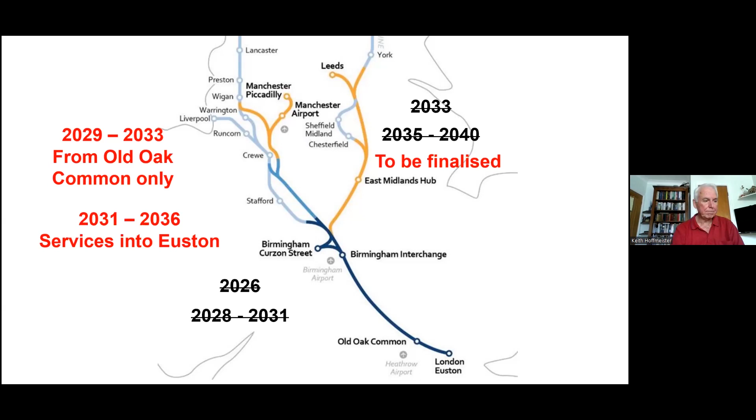Last November, it was announced that the eastern leg to Leeds would be cancelled. It's estimated that stopping construction at East Midlands Hub rather than Leeds would save £18 billion.

Last month, Andrew Stephenson, the HS2 minister, confirmed that the Golborne link between Crewe and Manchester will also be cancelled, saving another £3 billion.

Trains will eventually leave a massively redeveloped Euston station in a tunnel. HS2 has shifted its focus from developing a world-class rail station at Euston to one that is highly functional and affordable. Following months of deliberation, HS2 changed the design for Euston to a station with 10 platforms rather than 11 to save cost.

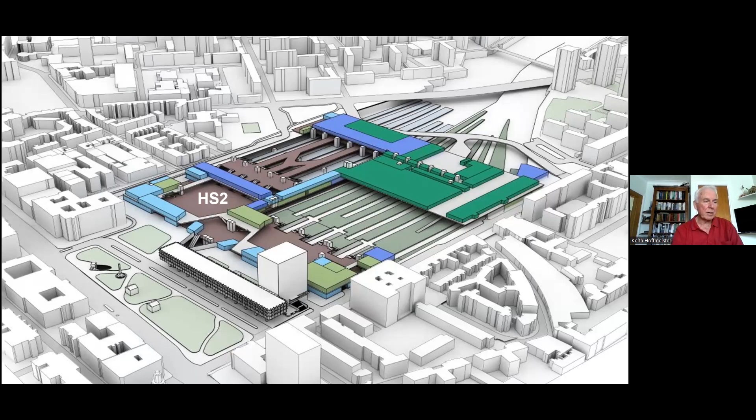It will have 14 platforms: 6 for HS2, 4 Elizabeth Line platforms, and 4 conventional rail platforms for Heathrow Express and Great Western Railway services to Wales and the South West.

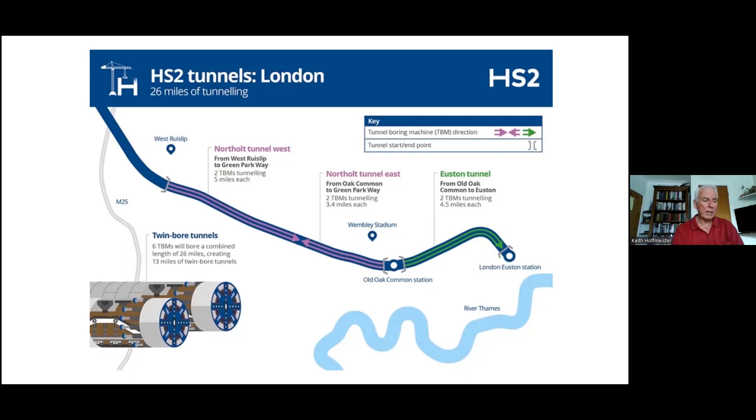The route will continue in a tunnel, and there will be 6 tunnel boring machines, TBMs as we refer to them, and they will bore two 13-mile tunnels. They will be starting soon. They're being assembled now at West Ruislip. They will take nearly 2 years to dig the tunnels, finishing early in 2024.

The route continues on towards West Ruislip Station, where it leaves into a cutting 15 metres deep. It then continues alongside the existing Chiltern railway line, the line that goes through High Wycombe rather than the Amersham and Wendover branch.

This shows preparations for the construction of the tunnel portal, and as I say, it's also where they're assembling 2 of the tunnel boring machines.

The route crosses the Colne Valley Regional Park near Denham on a viaduct over 2 miles long and up to 10 metres high, with trains travelling at 200 miles an hour. It will be the longest viaduct in the country by a considerable distance.

A haul road is being constructed along the length of the viaduct on a series of jetties across 4 lakes. This will take most of the construction traffic off local roads. Here we're looking back across the first lake, known as Harefield No. 2 Lake, towards the south end of the viaduct.

It then crosses the Grand Union Canal, and we are assured that the towpath will remain open during construction. There's a break in the haul road here, a missing link, which is in fact across the Grand Union Canal.

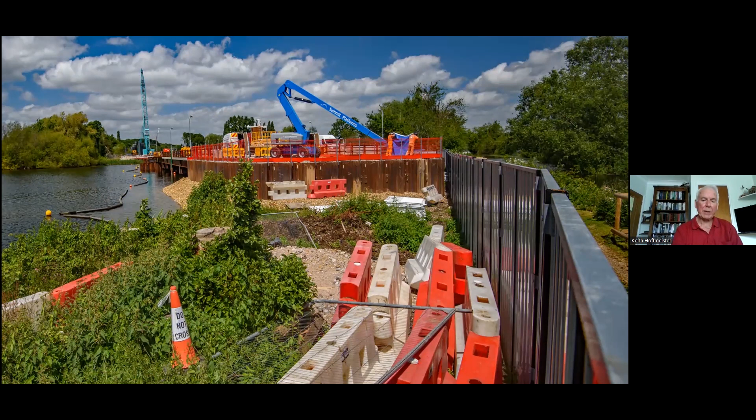The viaduct will be supported by 56 piers, most of which will be built in the lakes. This is already at just north of the Grand Union Canal. This is pier number 20, and it's on the edge of Savay Lake.

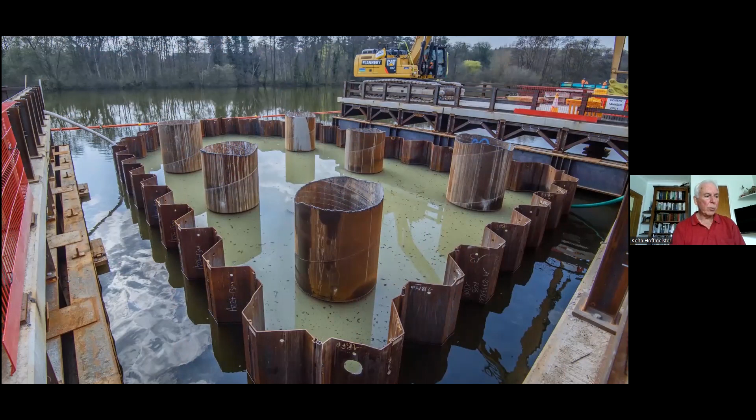292 bored piles up to 55 metres deep will be required to support the viaduct piers and the abutments at each end of the viaduct.

The haul road then crosses Moorhall Road and Korda Lake. Apparently the fish have been removed from here to a new temporary home.

The jetties cross the River Colne, and this has been slightly diverted around one of the viaduct piers.

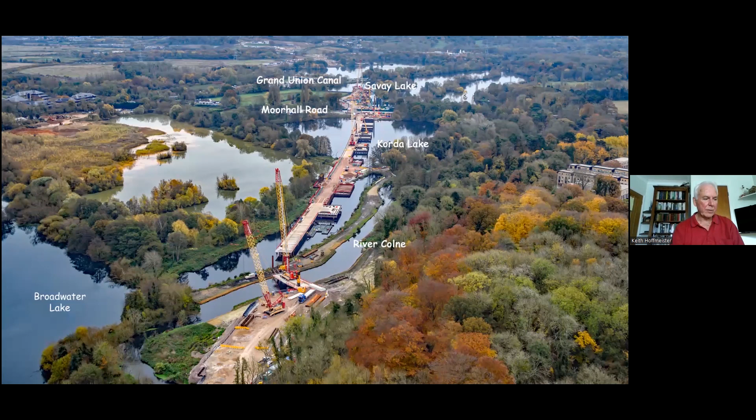Here we're looking south, back along the route as it crosses the regional park, and you can see almost the entire length of the viaduct there. You can just make out the southern end of the viaduct beyond the canal.

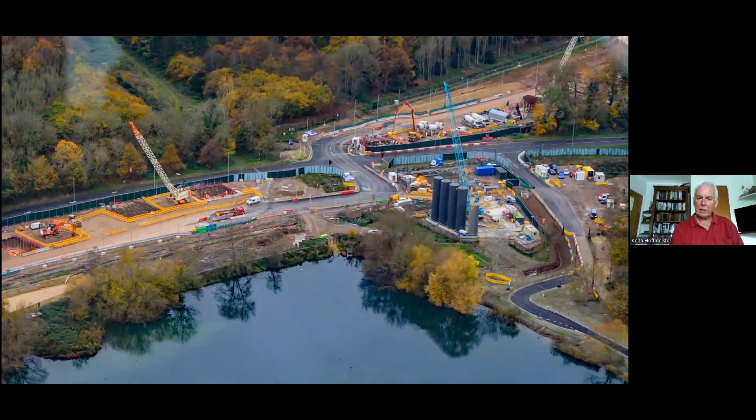The route then crosses the A412 North Orbital Road at West Hyde, and this is looking east along the North Orbital towards Maple Cross.

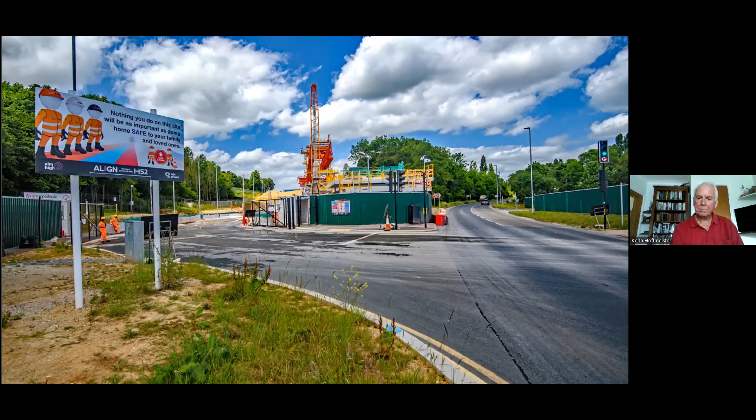Construction of the viaduct started at the end of May, and it's been due to be completed at the end of 2024. This is the launching girder, which is used to put the viaduct deck in place. It's not actually new and has previously been used to build a viaduct between Hong Kong and Macau.

You can see here the sections of the viaduct being gradually lifted into place. It doesn't happen very quickly, and if you stand watching, you're wondering whether anything is happening. But that's the first sections of deck being lifted into place. And this is just beyond there. This is the north abutment, where the viaduct joins the West Hyde embankment, which then continues off to the right.

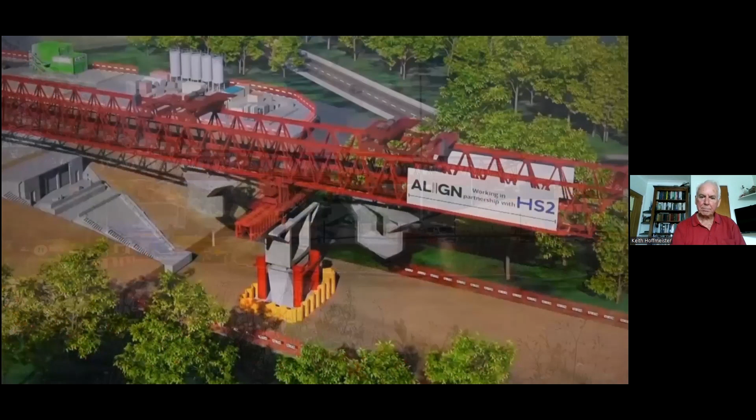This HS2 video just shows you how the sections are put into place.

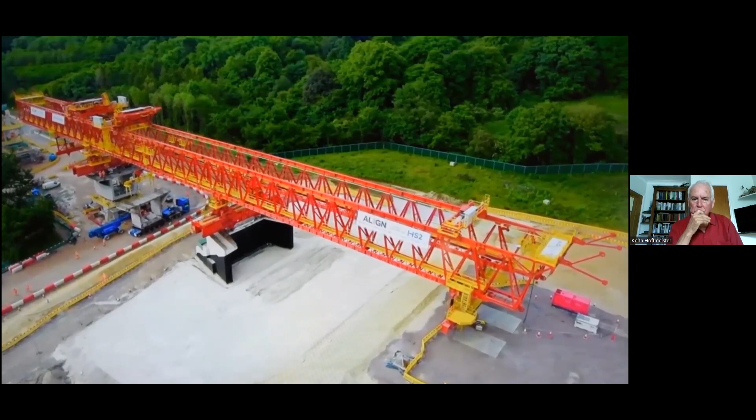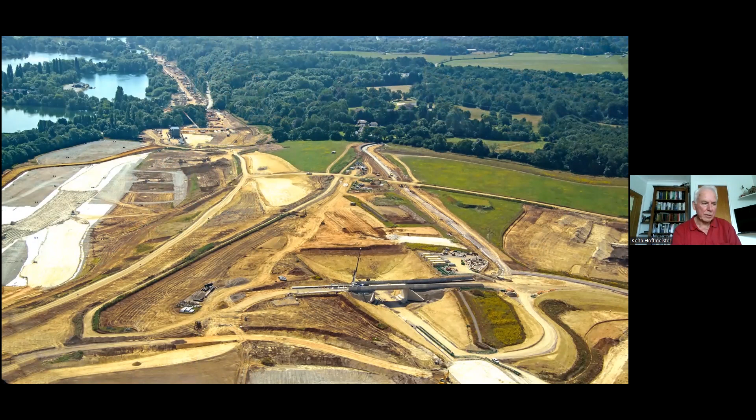Quite an amazing structure. The route then leaves the viaduct on the embankment and into the Tilehouse Lane cutting. And this shows the realigned lane crossing over Tilehouse Lane overbridge. Here we're looking back along the route under the Tilehouse Lane bridge.

And this is the Chiltern Tunnel's South Portal construction compound, and it's huge. It covers 136 acres. And when we talk about portal, that's just another name for the entrance and exit to a tunnel.

Apart from extensive office accommodation, there are a number of factories and storage facilities, as well as a visitor centre. This is the only site that provides overnight accommodation, which you can see just to the south of the main car park. The overnight accommodation is mainly for those working around the clock on the tunnel boring machines.

The first building you can see, the biggest building, is the Viaduct Segment Factory. Then the next one is the Tunnel Lining Segment Factory, and the far building is the Slurry Treatment Plant. There's also a water treatment plant to treat the excess water created by the tunnelling operations, and the batching plant, along with the surface water from the site.

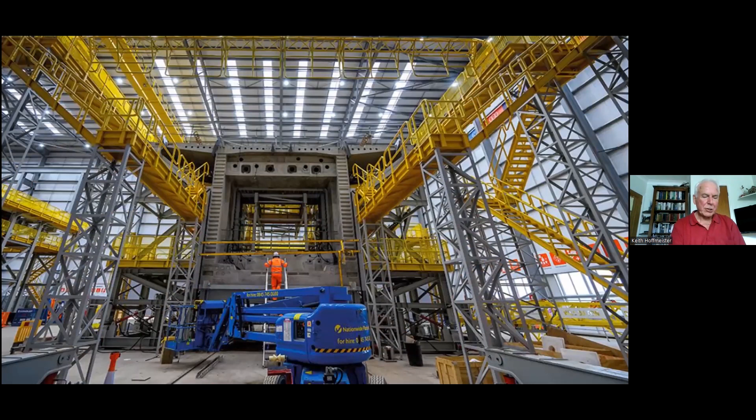This is the Viaduct Precast Factory, and it's huge - actually bigger than the Albert Hall. Each section is cast against its predecessor to ensure a perfect fit. Each will weigh up to 140 tons, and they're currently making 12 each week.

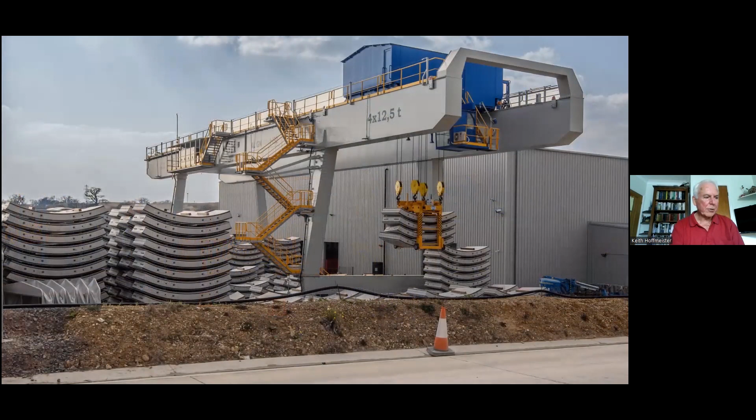They are moved outside to cure and then taken along the haul road as they're needed. The giant crane, which moves the segments around the worksite, has the biggest lifting capacity in the UK, and this is actually the first time it's ever been built and put to use.

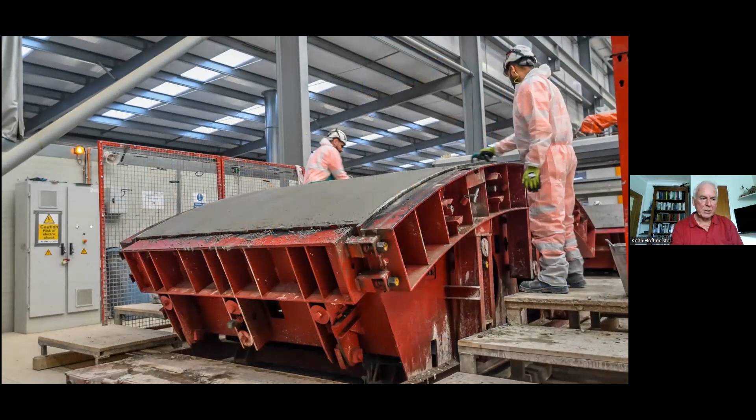The second building is the tunnel lining segment factory. 196 lining segments are made each day, and each of them weighs 8 tons. They are not all identical, and each has an identifying barcode. They are stored outside for 28 days to cure.

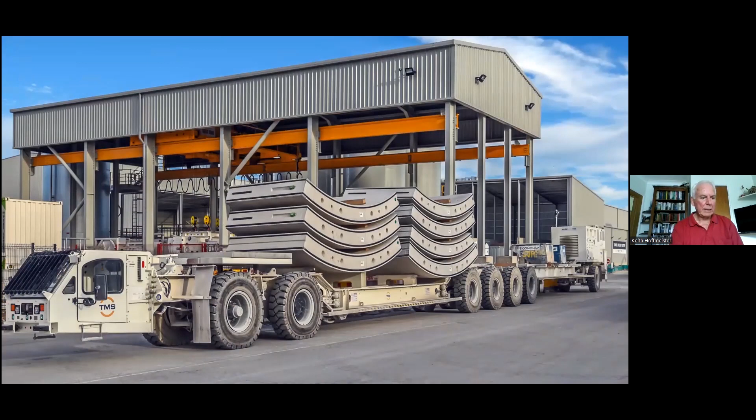And then moved along the tunnel on these double-ended vehicles. Each section of the tunnel contains 7 segments, and there you can see there's 7 segments on the back, so they're taken up one section at a time.

And if you think about it, they will have to travel up to 10 miles to get to the northern end of the tunnel. I think it's a difficult logistical problem to make sure that they all arrive - they're not all the same - and they all arrive in the right place at the right time. Quite incredible.

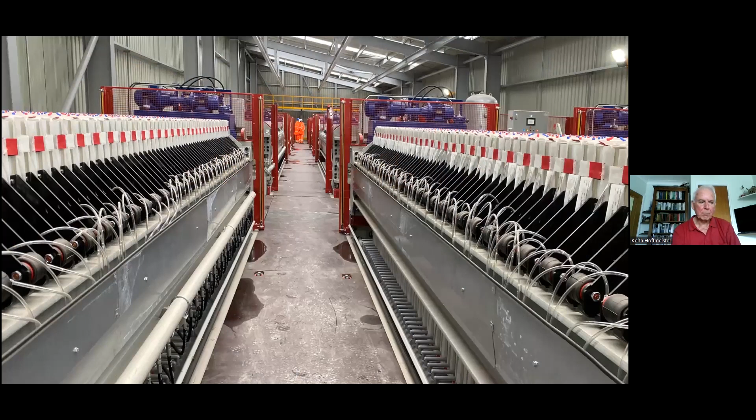The third building is the slurry treatment plant. 3 million cubic meters of spoil will be removed from the tunnel and treated here. This is the largest filter press in the world, where water is removed by squeezing the slurry at a pressure of over 200 pounds per square inch. And they can process 30 tons of slurry every hour.

The treated slurry is then used for local landscaping and was indeed used for the construction of the viaduct embankment, which we mentioned earlier. This will also help create around 90 hectares of wildlife-rich chalk grassland habitats once construction is complete.

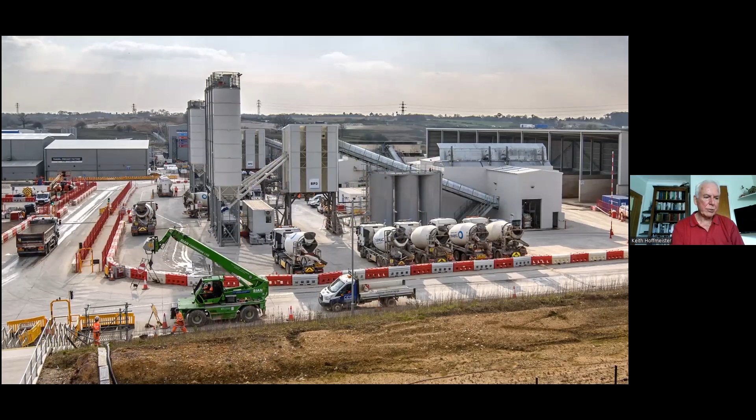The batching plant here produces all the concrete used on site, as well as for all the tunnel vent shafts and the North Tunnel portal. And this saves an awful lot of lorry journeys because, as you'll see later on, subsequent sites have to import viaduct sections and they all come in by road.

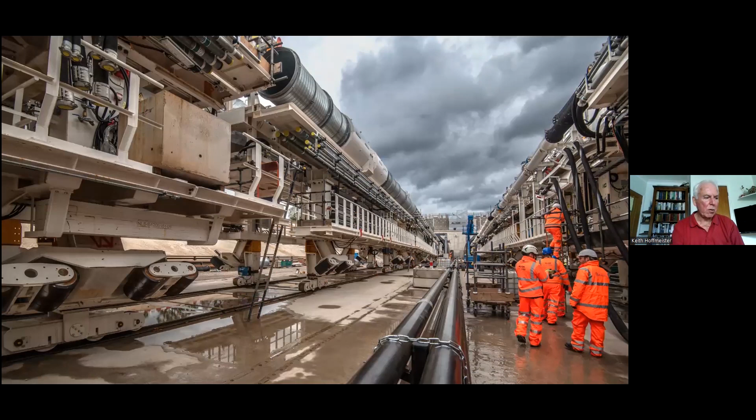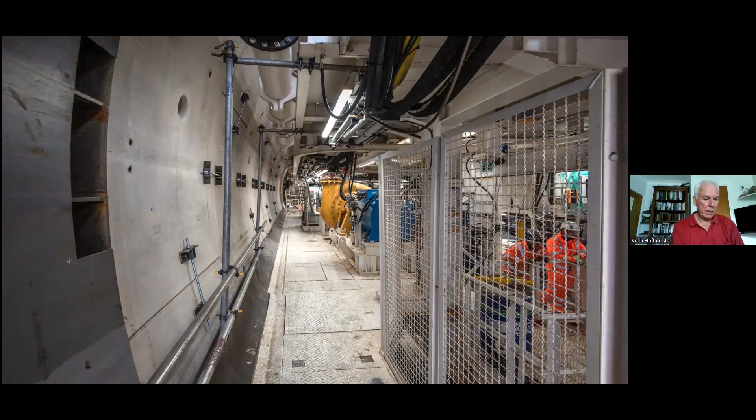The 2 TBMs are nearly 200 meters long and have been specifically designed for the mix of chalk and flint they will encounter in the Chilterns. They began tunnelling in May last year, and they are expected to take around 3 years to excavate the 9-meter diameter tunnels, cutting around 15 meters a day. Each has a crew of 17 people.

And here you can just see, this is the start of the tunnel. You can just see the beginning of the first section on the left-hand side.

And this is inside the tunnelling shield, where the spoil will be mixed with water to form a slurry, which will then be pumped back to the treatment plant.

And this shows the tunnel lining section being put into place - 7 segments in each section, each weighing up to 8 tons, and they're put into place by this giant robotic arm.

So far, at the beginning of this month, they've done 3 miles of tunnelling. They've passed under Chalfont St Peter and are on their way towards the Chalfont St Giles vent shaft.

In May, there was a fire in one of the tunnels. It was on a vehicle that transports workers into the tunnel, one that's shown here. The three removed themselves safely from the car and sheltered within the TBM safety chamber. Hertfordshire Fire and Rescue Service were in attendance, but were not used.

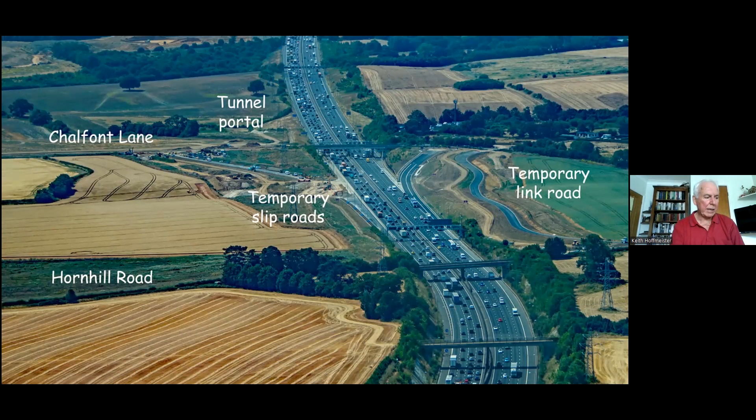All the HGVs arriving at this compound now use the temporary slip roads directly onto and off the M25.

The route then enters the 10.6-mile long twin-bore Chiltern tunnel, passing under the M25. There will be cross passages between the tunnels every 320 metres, and there will be some 40 in total.

This shows the 4 tunnel ventilation shafts across the Chilterns, and there will also be an intervention shaft near the North Portal at South Heath. These would also be used for emergency access during operation of the railway.

Tunnels will be up to 90 metres deep, and the deepest part is just before the Amersham shaft at the top of Gore Hill. The A413, which we mentioned, is the main road passing the Chalfonts and Amersham, and then on to Great Missenden and Wendover.

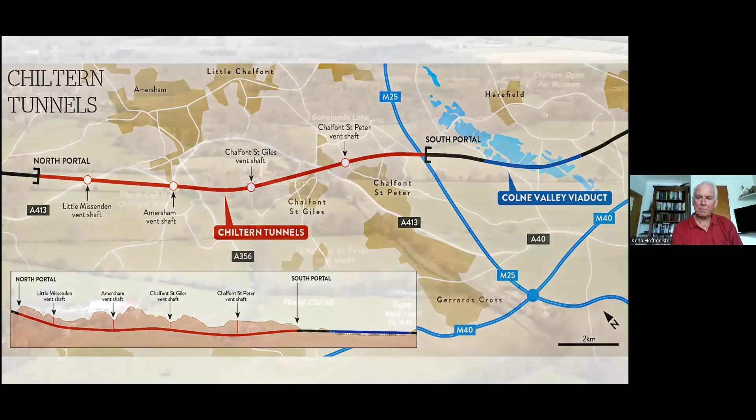The first of the vent shafts is in Gorelands Lane, Chalfont St Peter, up near the Chiltern Open Air Museum.

This shows how all the ventilation shafts will be constructed. Put simply, a cylindrical hole is cut, then filled with concrete creating the diaphragm wall, known as the D-wall. That's what it's known as. The spoil is then removed, creating the shaft with a base added in preparation for the arrival of the TBMs.

A head house is finally built over the shaft, and this is the only part that will be visible above ground level. The vent shaft here is now complete, and the internal structures are being installed. You'll notice now when you visit, if you pass any of these shafts, there's a huge crane in place, and this is what they're doing, putting the internal structures in.

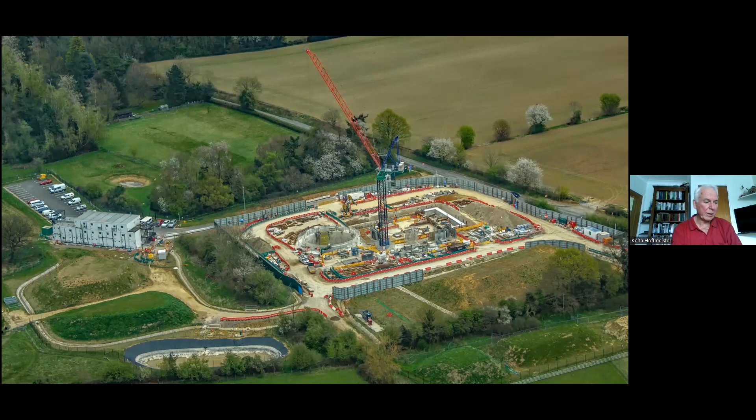A basement for the ventilation fans has also been constructed, and this is the deepest of the shafts at 78 metres. The TBMs passed here in March. This was the first shaft they arrived at.

This gives you an idea of what the head house would look like, the design for the head house, and it was decided after consultation with relevant bodies. It's designed to look like a farm building in a rural location. In fact, all of the shafts, other than Amersham, which we'll come on to later, look like farm buildings.

A 400-metre long temporary haul road here links the site directly to the A413. All the construction sites have approved access routes, and the one for this site is via the A413 to the A40 at Gerrards Cross, and then the M40 and on to the M25.

Temporary traffic lights control traffic on the A413. This is the first, if you're coming towards travelling away from the Chalfonts, this is the first of the traffic lights, and there'll be an operation till the shaft is completed, which will be early in 2025.

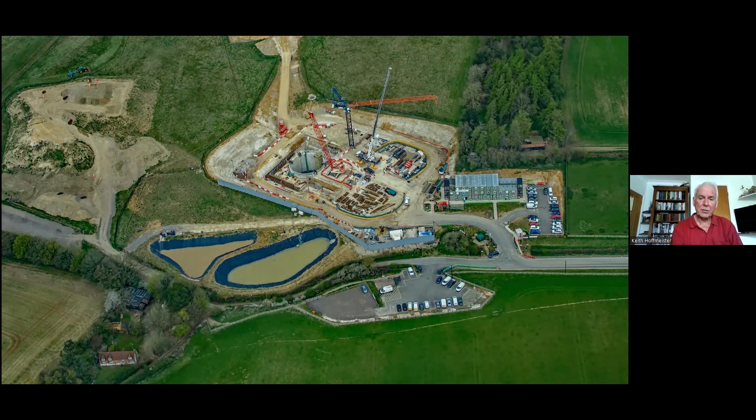Excavation of the shaft here is complete and the base slab of the shaft is being formed. The basement that will house the fans is also being constructed. Tunnel depth here is over 34 metres and the site will also house an auto transformer station.

The TBMs are due to arrive in August or September this year, and work is due to be finished by January 2025.

There are worse places to be a crane driver. This is a quite extraordinary picture. I think this is one of the cranes that are now in place at most of the shaft sites.

Access to the shaft is via a temporary haul road linking it to the A413, and this will be removed once construction of the vent shaft is complete.

The approved access route for this site is the same as for the Chalfont St Peter shaft, and all HGVs have to turn right when leaving the haul road.

The entrance to Bottom House Farm Lane is stopped up, and there is a link to the haul road to provide access further down the haul road. And this is actually where the two link.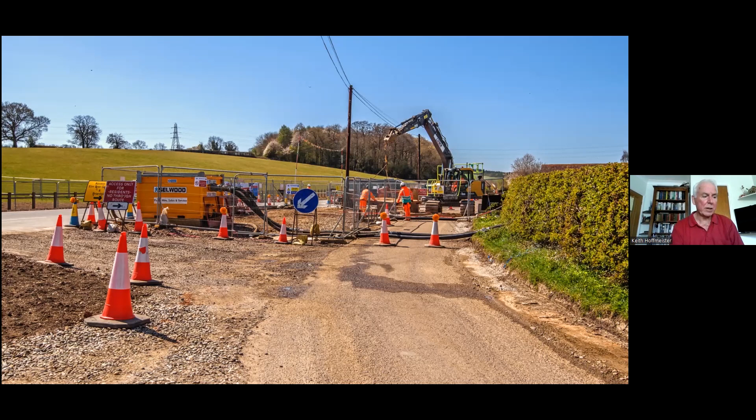The lane was closed to all traffic for much of last year. Frustratingly, this included pedestrians and cyclists. A large drain was installed alongside the length of the lane.

The lane was also widened to provide permanent access to the vent shaft. It remains single lane, but passing places have been added.

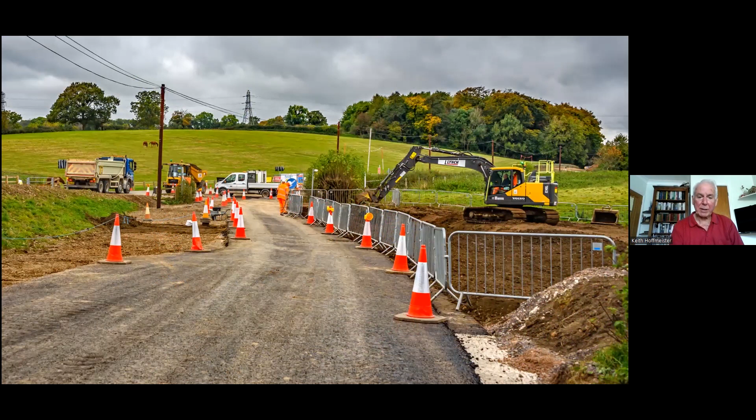Half a mile of hedging, the whole of one side, all the way up to the vent shaft, was removed, very sadly and very shockingly. This is probably at the worst of times here.

The whole road was removed, and the hedge on one side, and it was replaced with the haul road.

And once the haul road is removed, which it will be when construction is complete, the lane will be restored, and planting hopefully will restore it to somewhere. It won't be quite as dramatic as it was, but at least it will be an improvement on how it is now.

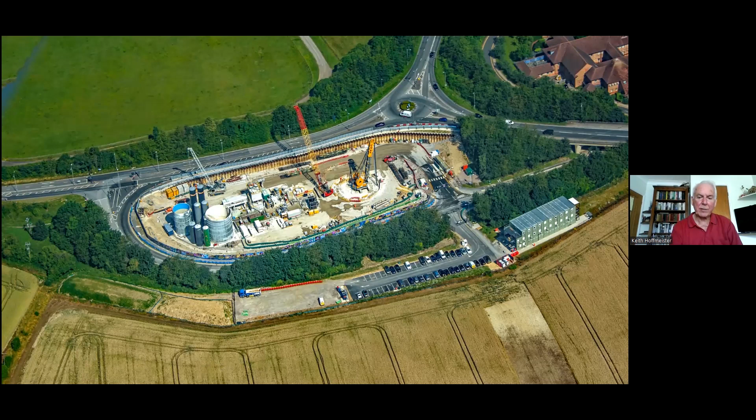This was taken when construction of the D-wall was underway. The tunnel depth here will be over 40 metres. All the shafts will have a permanent area of hard standing for emergency service vehicles.

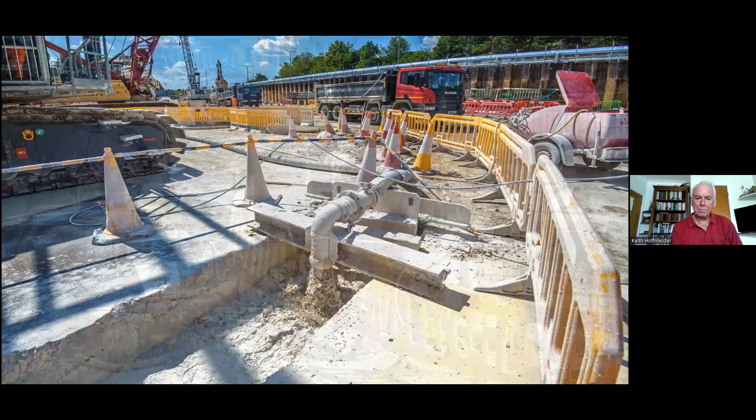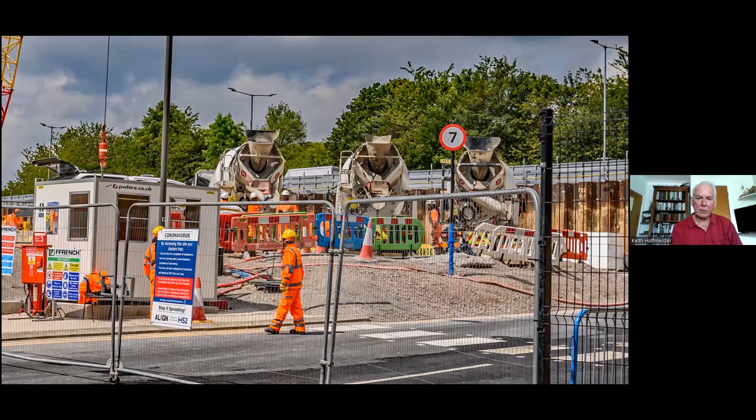The bentonite slurry is used to lubricate the drill and to stabilize the cutting. Each panel was then filled with concrete in a continuous process. And as I've mentioned, concrete for all the shafts comes from the batching plant at the South Tunnel portal.

All the vehicles have their wheels washed before leaving all the sites. Something they're very concerned about is spreading mud onto the roads.

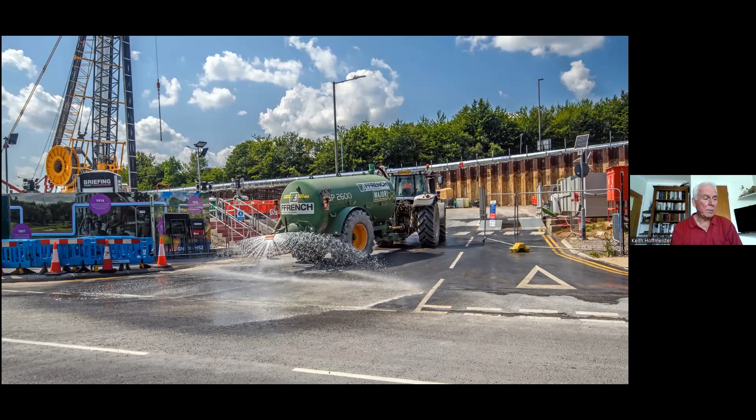In weather like this, dust is a big problem, and there's continuous dust suppression with this bowser going from one site to another, just trying to keep the dust down.

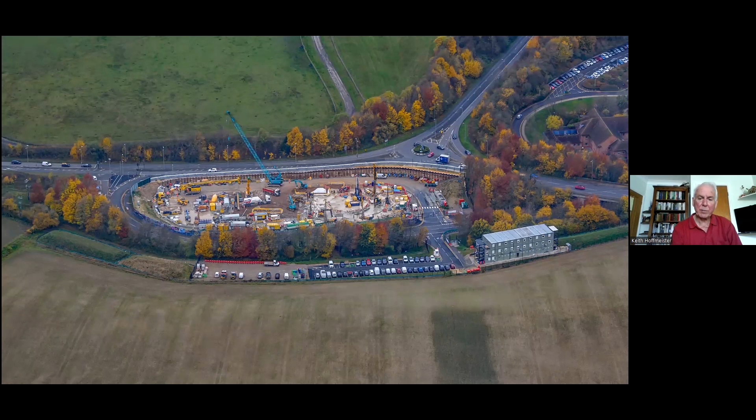Once the D-walling was complete, the associated plant was removed in preparation for the next stage, and this involved the insertion of grouting into a ring of piles drilled around the shaft to stabilize the area all around the shaft.

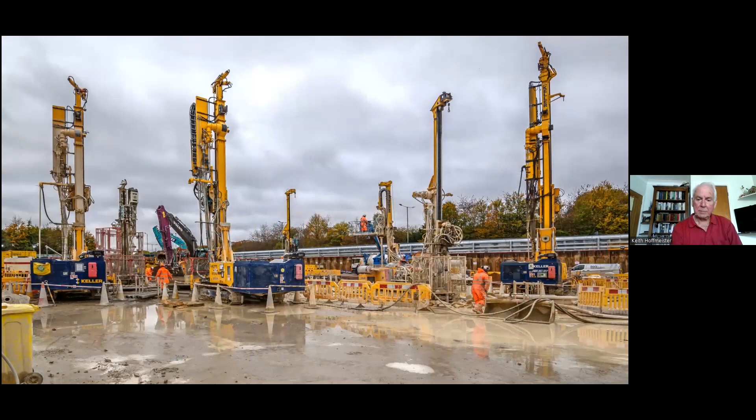These are the drilling rigs in operation. As with most sites, air quality and noise levels are constantly monitored.

The hoardings surrounding the site have been decorated with murals depicting the history of Amersham. And these extend alongside the A404.

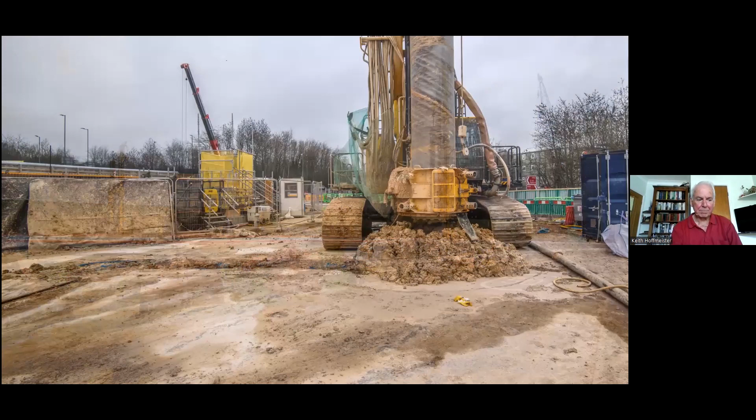The huge rig you can see here, which was very obvious to anybody passing, was used for secant piling. This consists of a large number of interlocking piles, which are used to create the head house basement. These will eventually house the fans used to ventilate the tunnel.

Excavation of the vent shaft here is now complete, and I did wonder how they would get everything out right down to the bottom, quite a few metres down this shaft. And you can see the excavation underway there.

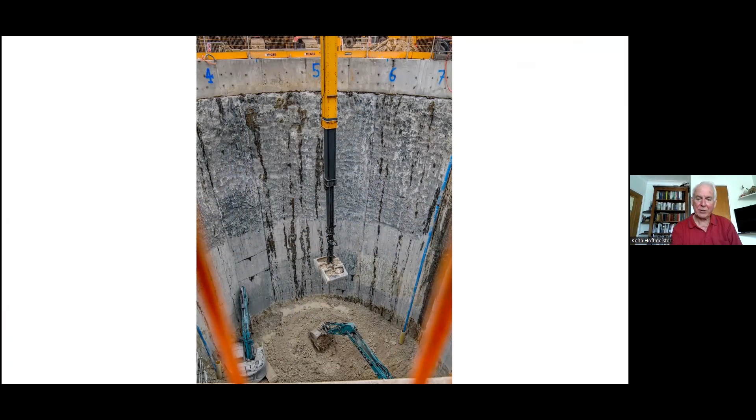This telescopic grab excavator can reach down 35 metres. And below that, a container is lowered by a crane to be filled by, well, there's two diggers actually down there at the bottom. Altogether, 11,000 cubic metres of spoil were removed from this shaft.

And if you wondered how it works, this is the grab in operation.

It takes 5 grabs to fill a truck, and it made me think of emptying a bucket of sand with a teaspoon, a long and laborious process. The spoil that was excavated is dry, so it didn't need any treatment, and then that was removed, as all the spoil is, from all the tunnels and the vent shafts, down to the South Tunnel portal, where it was once again used for landscaping.

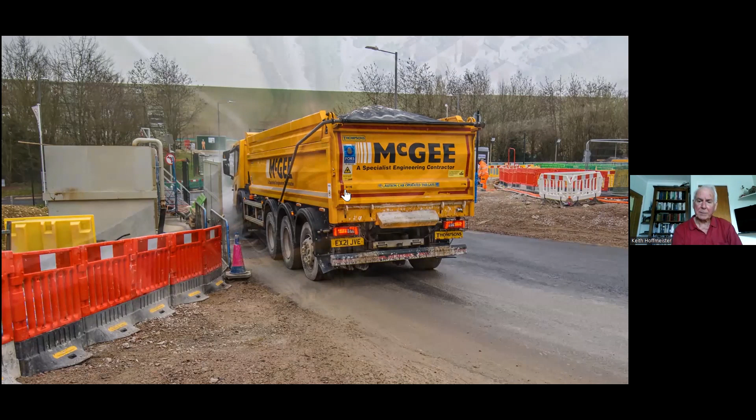Construction of the head house is due to begin in April 2024, and I think once the planting is in place and the trees have started to mature, you won't see very much of this head house.

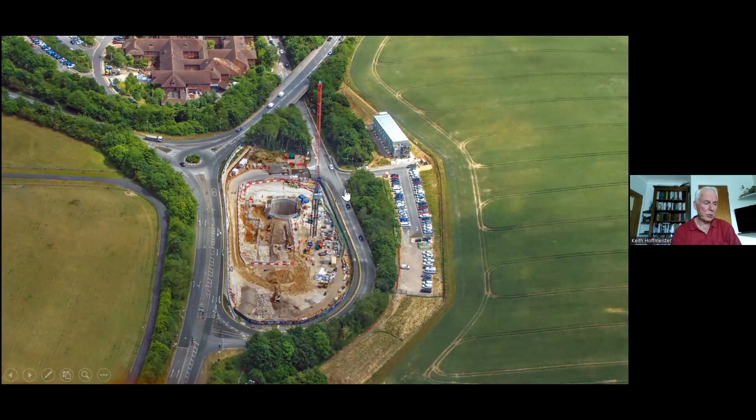The construction of the internal vent shaft structures, the floors and access, is now underway in preparation for the arrival of the TBMs early next year. The vent shafts are all due to be completed sometime in 2025, and this one is due to be completed in April 2025. The tunnel passes between the 18th century Shardeloes House and Shardeloes Lake, and then under the Misbourne for the second time.

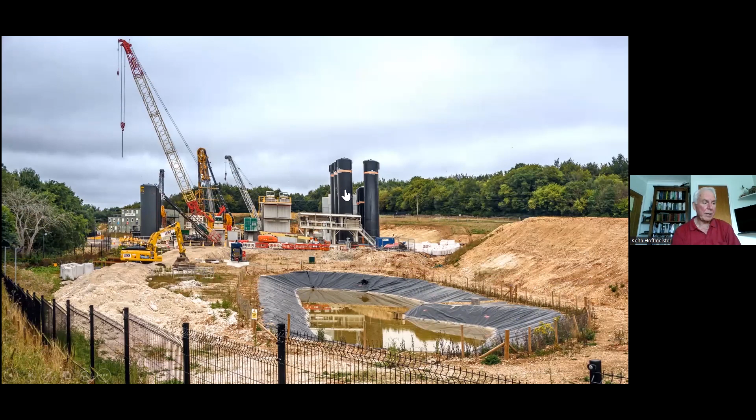The fourth vent shaft is alongside the A413 in Little Missenden along the dual carriageway. Tunnel depth here is over 35 metres, and this site will also house an auto transformer station. This is looking west across the 413 and shows the close proximity of the River Misbourne, and once again we have concerns about the tunnelling when it passes under the Misbourne.

The approved access route for all of the sites from Amersham to Wendover is via the A413 back to Amersham and to the A355, then up Gore Hill to Beaconsfield and onto the M40. Access to the shaft here is via a newly constructed right-hand turn across the dual carriageway. Anyone who has travelled to Beaconsfield will be aware the new link road is now open, so traffic doesn't have to go around the little roundabout in Beaconsfield - you can now turn left before it and link up with the Pyebush roundabout on the A40 on the way to the M40.

This right-hand turn will save a 5-mile trip, because previously vehicles had to go all the way up to the Frith Hill roundabout at Great Missenden and then back again. One does wonder how vehicles like this manage to negotiate this small roundabout. The turning is controlled by traffic lights, and it will all be removed and the central reservation reinstated once construction of the vent shaft is complete - and we just hope they remember to put the daffodils back.

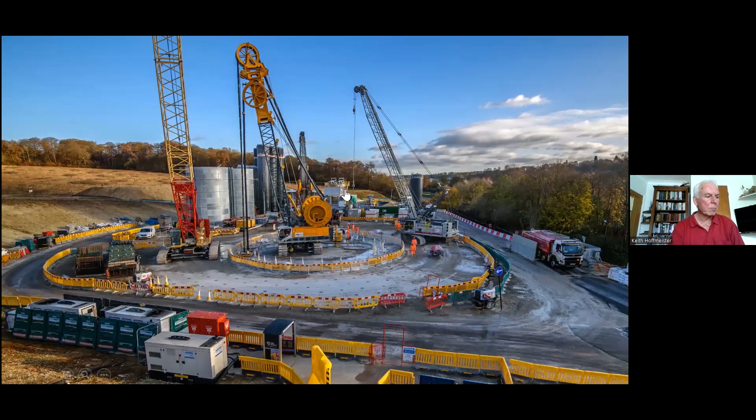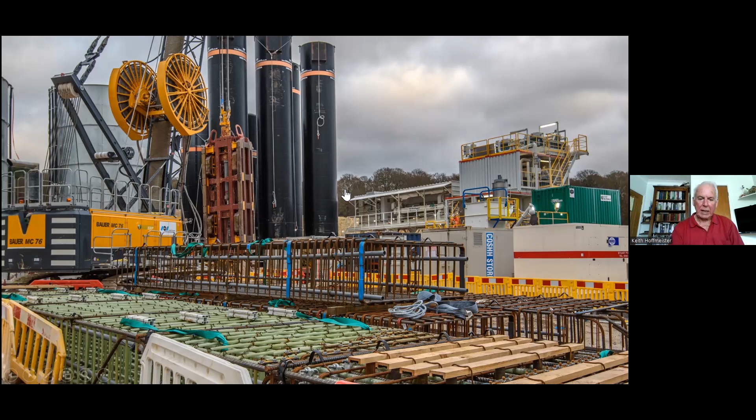This shows construction of the diaphragm wall here. Steel reinforcing frames were inserted, as with all the shafts. Some are made with glass fibre reinforced plastic, used where the TBMs will break through, so they will just tunnel straight through. These are used at all the diaphragm walls, including the north portal. The panels are then filled with concrete in a continuous process, so sometimes working hours were extended so this could be completed in one go.

As with all vent shafts, working hours were temporarily extended at this time from 7 p.m. till 10 p.m.

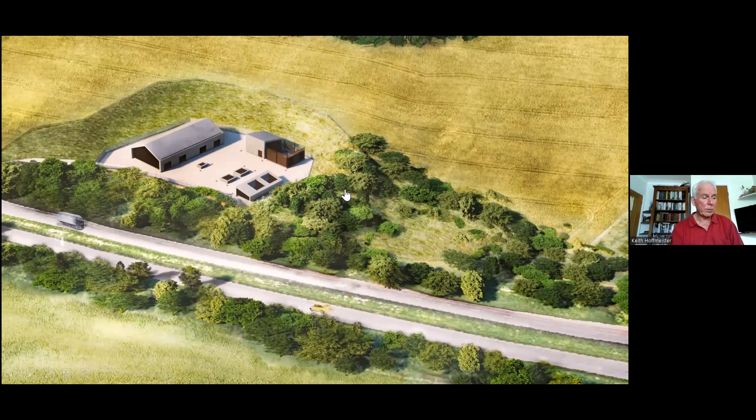This is what the head house will look like here. 1,700 trees will be planted, some 20 different species - I don't think you'll see the vent shaft once the trees have matured a bit. TBM should reach here in July or August next year, and again here work was due to be completed in April 2025. One public right-of-way is diverted around the compound here, and it will be reinstated along its original route once construction is complete.

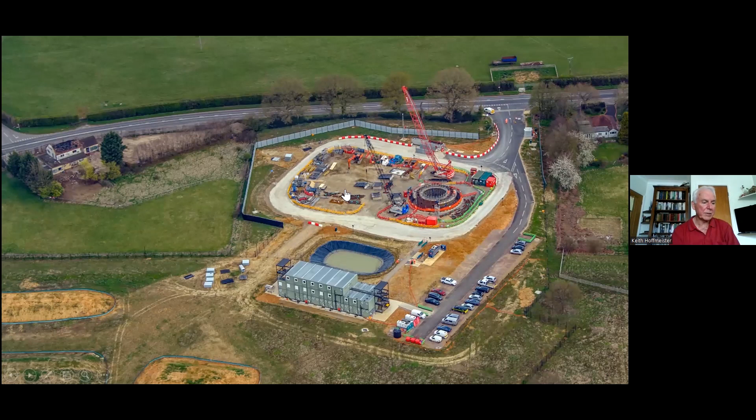The final shaft is the Chesham Road intervention shaft, situated near the former Annie Bailey's restaurant in South Heath. You can see here the large number of archaeological trial trenches that were dug before construction got underway, not just here but along the whole route. As this will be an intervention shaft only, it will not have any fans, so it will not have a basement. Shaft depth here is over 43 metres, and this site will also have an auto transformer station.

Because the shaft is above the water table, a different form of construction called the Caisson Method is being used for this shaft. Put simply, sections of the caisson are constructed above ground and then sunk to the required level by excavating material from within the caisson.

I remember saying at the last update that I couldn't say more because I hadn't visited the site. Well, I spent 3 hours here on a visit last month, and at last I've got my head around this different construction method. I even managed a trip to the bottom of the shaft.

So the shaft is probably about half as deep there as it will be. This is looking down towards the bottom of the shaft from the construction platform where the next section is constructed. And this is the base, where they remove the spoil to allow the shaft to sink, which I can't imagine will work, but there you are - that's how they do it.

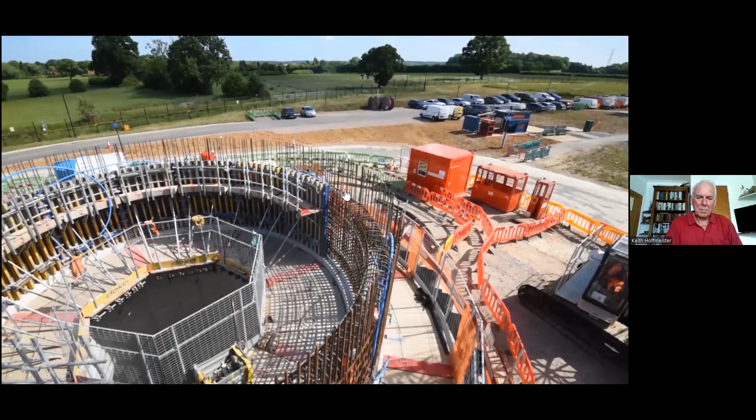One public right-of-way has been diverted around the spoil storage site here, and that will be reinstated along its route once construction is complete.

The TBMs are due to arrive here at the end of next year, and again here work is due to finish in April 2025.

The North Tunnel portal is situated just north of Frith Hill in South Heath. Here we are looking across the portal and the South Heath cutting towards Potter Row. And this is looking east towards the tunnel portal, and locals will recognise Jenkins Wood beyond, with Potter Row beyond that.

The portal head wall is constructed using the same diaphragm wall method as the vent shaft, so we're familiar with that, and that's the grab that is used to excavate the shaft. The crane driving is very highly skilled, and it was pointed out that you won't find any crane drivers under 50 years old. And the crew here are actually all Spanish.

Now we're looking north from the tunnel portal, and this is where the TBMs will exit the tunnel. They are due to finish here in December next year, and they will then be dismantled and scrapped. And the contractors here actually changed from Align joint venture to EKFB.

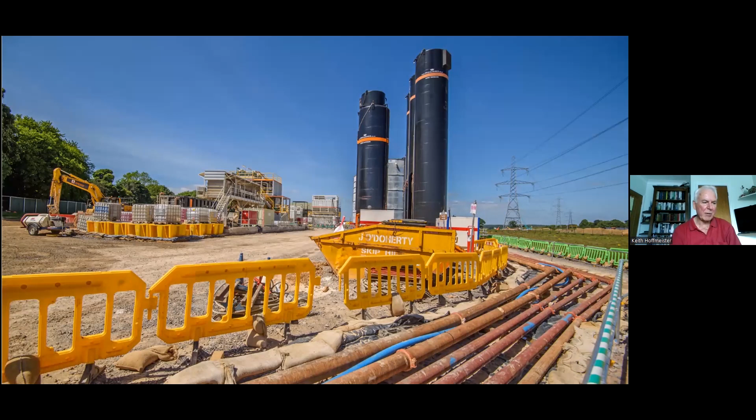These are the bentonite silos with water storage tanks beyond, and also this is the slurry treatment plant. Water is not supplied from the local supply and is delivered by tanker, which you can see unloading here.

Treated slurry is then transported to the South Tunnel portal, where again, the same as the others, it will be used for landscaping. The tunnel will run through deep alluvial clay between Frith Hill and the North Portal, and this will not be strong enough to support the tunnel.

96 concrete supporting pillars, known as barrettes, are being constructed, again using the diaphragm walling method that's used at the portal. When the TBMs arrive, as we mentioned, they will bore straight through the sections of the barrettes to form a safely strengthened tunnel.

The former Weights and Measures gym, and before that it was the Black Horse pub in Frith Hill, has sadly been demolished. This will allow permanent access to the portal once construction is complete and the temporary haul road is removed.

Access to the North Tunnel portal is via the temporary haul road from the Link Road roundabout at Great Missenden. Another haul road has been constructed alongside the route linking all the construction work as far as Wendover. It means a lot more devastation, but does remove traffic from the local roads.

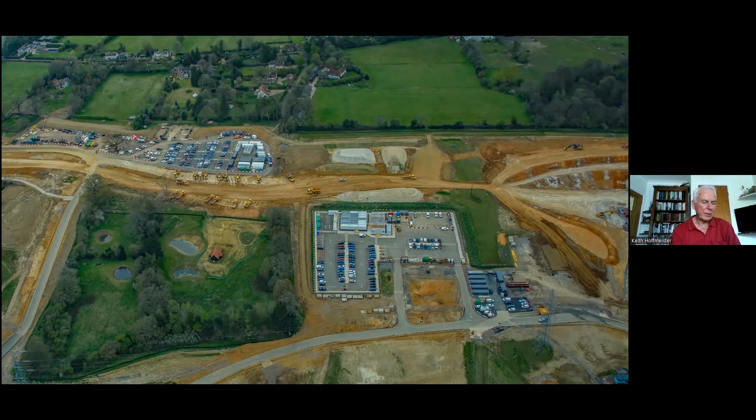Moving north, the first over bridge will take public right-of-way GMI 12 over the route here, down the middle of the picture. This is the first EKFB compound, and the top car park is actually where Mulberry Park Hill once stood. It's the only house to be demolished here along this section, and you can see what remains of the garden just below it.

Looking east towards Potter Row, showing the two footpath over bridges, the one we just looked at, and now moving along to GMI 2, which is to the right. The footpath is actually to the right of the picture, and that will remain open during construction. It will eventually be diverted across an overbridge which crosses the route just to the north, and you can see where that will cross just above Havenfield Wood.

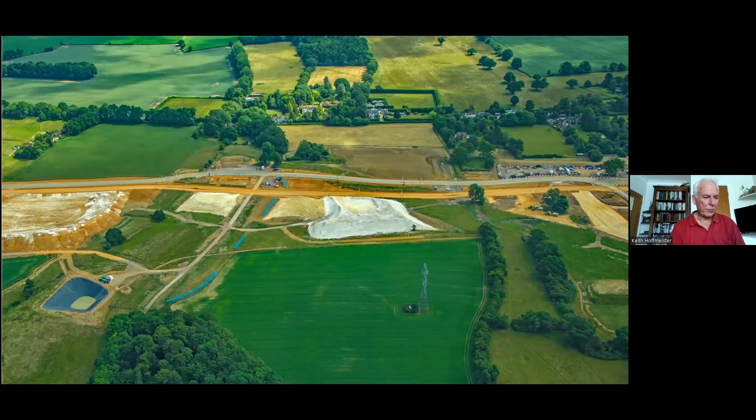There is a manned crossing in place here, which is probably just as well with these things crossing. This is where the road then crosses Leather Lane. 11 large oak trees have been removed so far. Offline construction means the bridge will be constructed to the south of the road, which will then be diverted once construction is complete.

An alternative plan for the overbridge, moving it to the north of the lane and involving the loss of fewer trees, has been put forward and is still being discussed. It is possible, but we await developments.

Leather Lane is a very important bat corridor and provided refuge to at least 7 species of bat, including the endangered barbastelle bat.

This is looking across the actual route itself as it crosses Leather Lane, and this is looking west towards the haul road crossing. And this is the reality now.

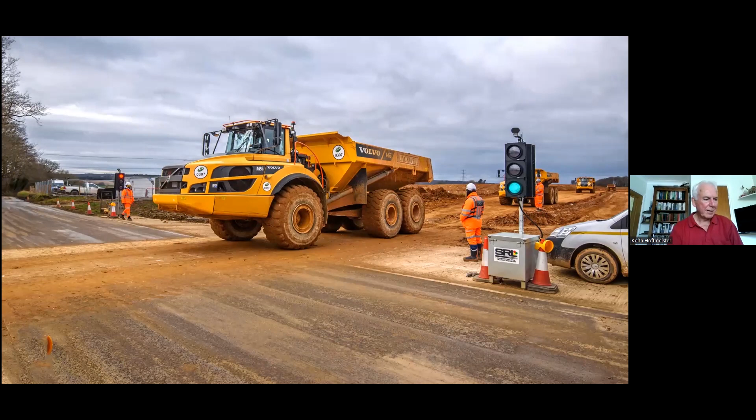These Volvo dump trucks have 16-litre turbocharged diesel engines and can carry 40 tons, massive things, and apparently have an onboard weighing system.

When I went up to Leather Lane to do that film, I went to take a photograph, hopefully, of one lorry crossing Leather Lane, one dump truck, and there's a continual stream of them in both directions.

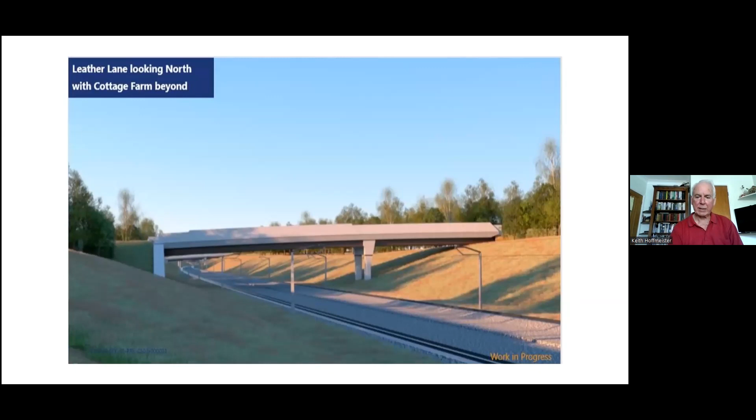So we're now looking at an artist's impression of what all the bridges will look like. The shallow cutting, alas, means that a very wide expanse of land is needed.

HS2 have conceded that it is not possible to create a new ancient woodland, or indeed to move an existing one, which is what they tried to do here.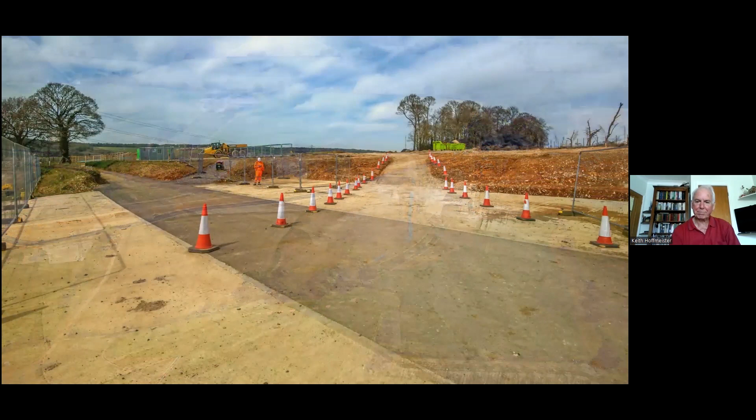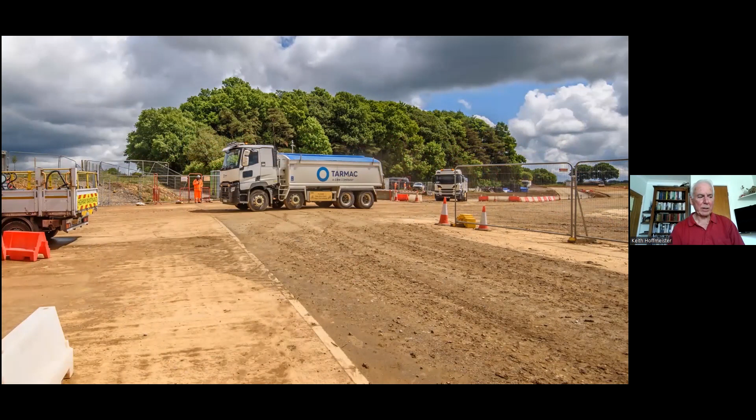This is just the haul road crossing the lane and heading towards Jones Hill Wood. The road is now complete all the way to Wendover. Hundreds of lorry loads of tarmac have been used, and all of this will have to be removed once the construction is complete.

This is public right-of-way TLE3, which runs alongside the lane and will remain open during construction. There is another manned crossing of the haul road. This serves as a diversion route for a number of other footpaths that are closed until construction is completed, including the very popular Chiltern Way.

We've been working with the contractors to ensure that these diversions are properly signposted. The hope is that these signs will remain in place and not be vandalised.

The route continues over Wendover Dean Viaduct, starting just north of Jones Hill Wood. Durham Farm has been demolished and piling is now underway, and this will be the viaduct's north abutment.

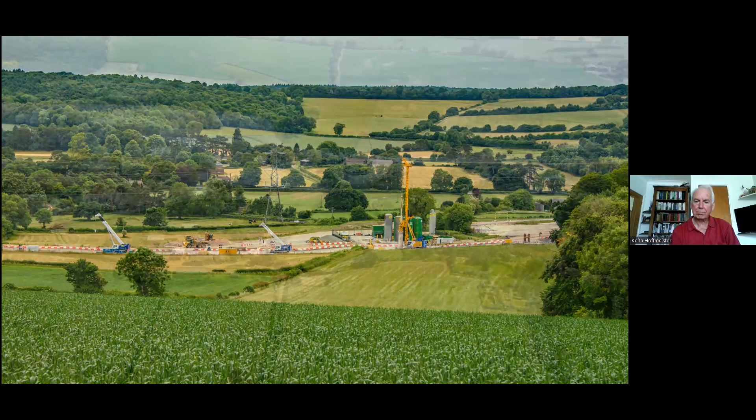Several public rights of way have been closed for the construction period, and the Chiltern Way will eventually be reinstated along its original route underneath the viaduct. This is what the viaduct would look like. It will be 450 metres long and consist of 10 spans.

Supporting piers will be up to 14 metres high, and these are all going to be precast off-site in sections before being transported to the site by road, as previously mentioned. Beyond the viaduct, the route will enter the Rocky Lane cutting, and to the left of the cutting here, there will be a plant maintenance depot and fuel storage, temporary, of course.

The route then crosses Rocky Lane on its way to Wendover. This will be an underbridge, meaning it will go under the route. Offline construction again means that this busy lane will remain open while a bridge is constructed just to the north of the lane, and then the lane will be realigned over the route.

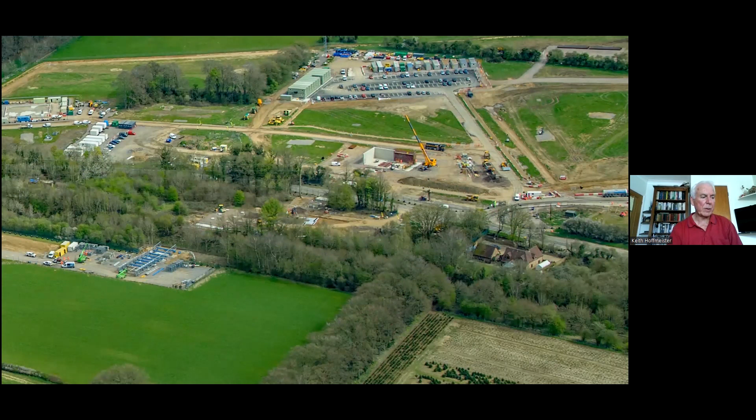A fully enclosed 600-metre long conveyor belt is being built to remove the stored spoil from earlier earthworks. This will cross the A413, and that section is clearly visible as you drive towards Wendover. It then crosses the Chiltern Railway and then Small Dean Lane. It will be used to move an estimated 640,000 cubic metres of spoil, well over 1 million tonnes of spoil.

The conveyor will be in place for 2 years. It is expected to save some 400 HGV movements a day over a 3.5-year period. It will start operating in September.

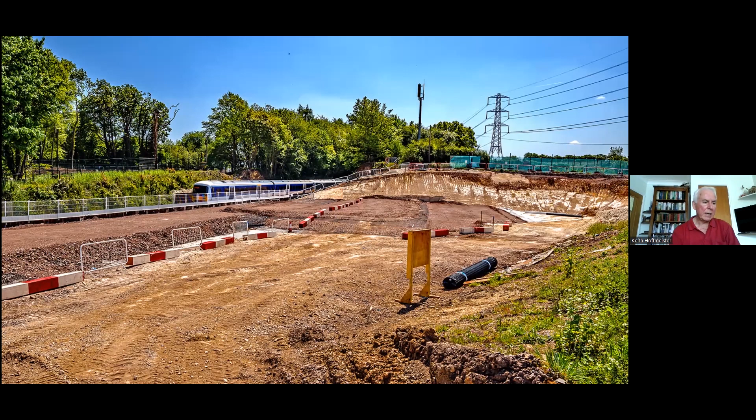This is where the viaduct will cross over the Chiltern Railway. So we're looking north from the A413 and then looking across from the other side. Extensive sheet piling here has been installed to protect the railway. An old footpath bridge over the railway just to the south of here has been removed.

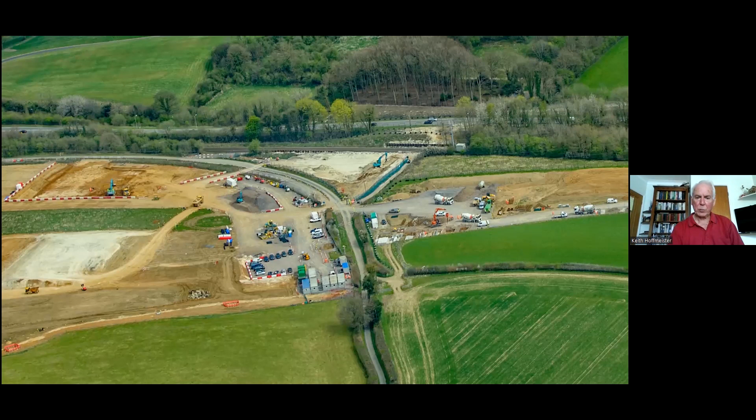It was here last year that archaeologists uncovered an Anglo-Saxon settlement of national significance, which was revealed on TV 2 or 3 weeks ago. 141 skeletons have been recovered, along with their 5th and 6th century burial grave jewellery. This is one of the largest Anglo-Saxon burial grounds ever found in Britain. It was also accompanied by other findings from previous Neolithic, Bronze Age, Iron Age and Roman activity. Quite a stunning find.

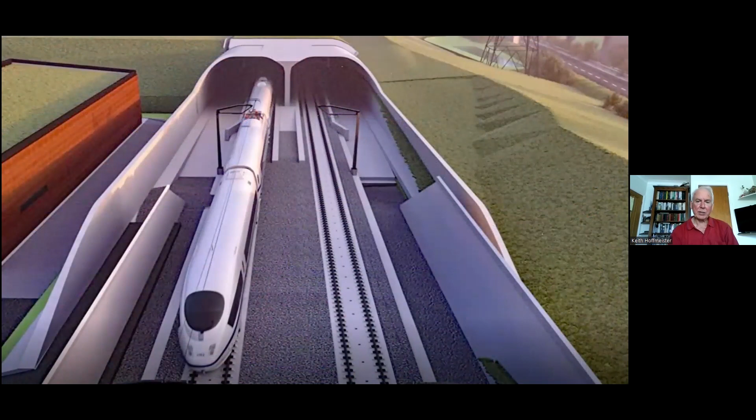I did mention this tunnel in the January update. It is designed as a double arch, with two separate halves for southbound and northbound trains. Five different concrete precast segments will be slotted together to achieve the double arch. Each will be steel reinforced, with the largest weighing 43 tons. Over 2,500 segments will be used.

The segments are being made in Ilkeston, Derbyshire, and then transported all the way by road, with each round trip over 200 miles. For some inexplicable reason, HS2 describes these as green tunnels. The tunnel will have specially designed porous portals on both ends to reduce the noise of the trains as they exit the tunnel.

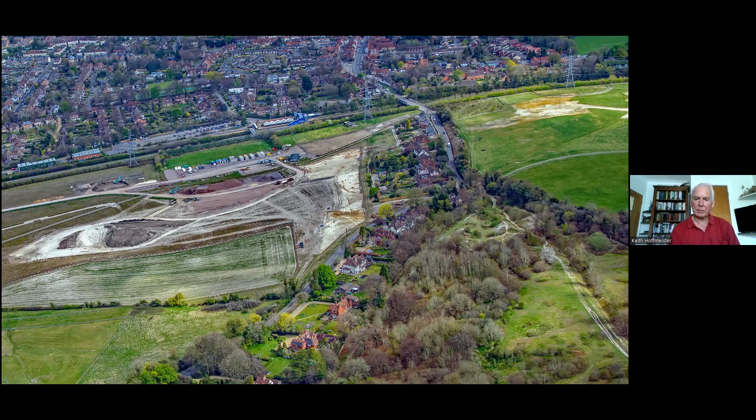And this is looking north along the tunnel past what was the Wendover Cricket Club Pavilion. The cricket pitch is now used by their offices. Nice piece of level ground.

This is looking west from Folly Bridge, across the North Tunnel portal towards Coombe Hill, and the route continues in the Wendover north cutting towards Nash Lee Road. This is the last of the bridges.

If you're driving along the A413 and you want to know where HS2 is going, if you're not familiar with any of the places we've been talking about, look at the overhead power lines on the right going towards Wendover and on the left as it crosses over - they more or less follow the route HS2 takes. Then along the Wendover bypass, there are three bridges and a footbridge.

The first of the three bridges is Bacombe Lane, where the South Portal is, and the last of the bridges is Folly Bridge, where the North Tunnel portal is. So it gives you a good idea of exactly where the tunnel will go.

And this is the entrance to the Wendover Green Tunnel North Satellite compound off the Wendover bypass.